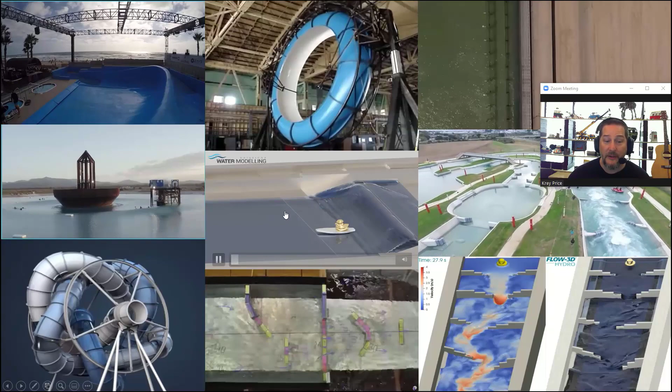As you can see in the background here, we're going to be looking at some fun applications of hydraulic modeling and design. We've chosen 3 activities to focus on today: rafting, surfing, and water slides, with presenters who have combined those particular personal interests with their professional careers. One of the main questions we want to answer for you today is when we move from 1D to 2D to 3D modeling, and when, despite all of the recent hardware and software advances, a physical scale model or a full-size model is still needed.

Along the way, we want everyone to get a feel for the underlying hydraulic principles involved and to see how designers use those principles. So if I'm going to take a ride on this water slide, for instance, and end up at the bottom while water is pouring in from the middle here, I really want to know that the designer understands Archimedes and other background essentials to keep me safe.

We'll also see some amazing new technology for modeling. At the end of today's presentation, we're actually going to get a special guest to come on who helped develop this movable endless water slide for the Discovery Channel, and we'll get to hear some of his experiences.

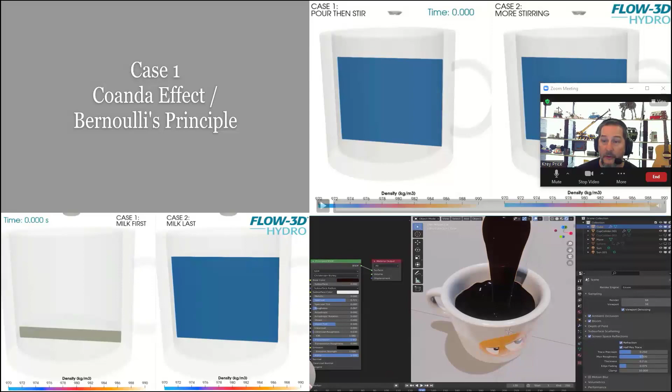Now, there were lots and lots of other random topics we could have chosen to present today. I put out a call a few weeks ago for people to submit some fun modeling applications. So as we kick off, since I see from the map that we've got people joining us from all around the world, all time zones, including ones that are in the wee hours of the morning, I thought I'd start with a CFD animation of your coffee cup.

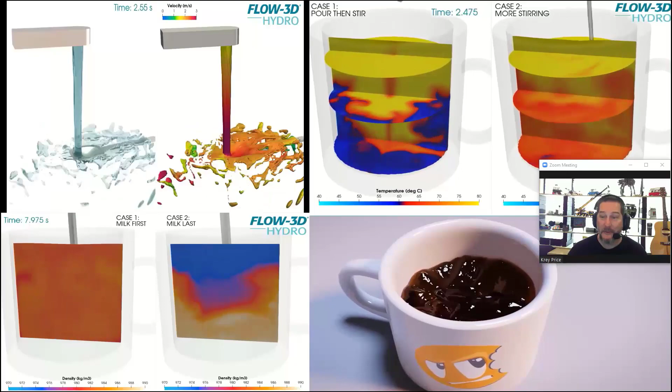This is courtesy of our friends at FLOW-3D. They'll show you here the differences between adding milk first or last and how you decide to stir it. So however you take your coffee, thanks for being with us today. Now, usually I've got a boring logo as my Zoom background. Since this is just for fun though today, I thought I'd turn off the filter and you can see what's actually behind my logo.

Yes, I'm a grown man with a Lego collection, and you can also see my guitar. My interest in Legos and music might not combine as readily with hydraulic modeling as some of the other hobbies we'll see here today, but I'll show how I try sometimes anyway to combine that.

We're going to hear a lot about waves today, and music is really just waves too. In next month's webinar on the Froude number, we're going to hear about how the transition between subcritical and supercritical flow in water is actually analogous to sonic booms in the air.

Since it's casual day today, I am wearing a t-shirt with an album cover that has waves, pulsar waves in this case. These ones are sometimes mistaken for sound waves or terrain.

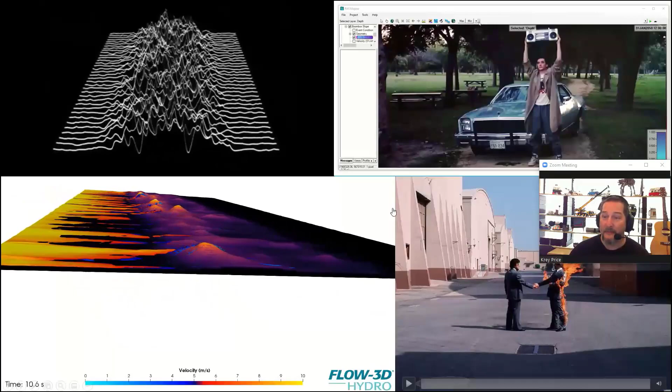Since this webinar is just for fun, I've included the winning entry here with some fluid dynamics right over the top. When I do courses, I'll grab some free terrain data for our tutorial models from random places that align with my interests, including this album cover, where I heard that this guy burned his mustache off in the photo shoot for the album cover, and we try to put out the fire in our tutorial model.

Also, if you've ever wondered why Lloyd had to hold his boombox up so high in the air, this park is actually in a floodplain with a drainage channel, and we've taken out his Malibu with the flood wave here in this tutorial model.

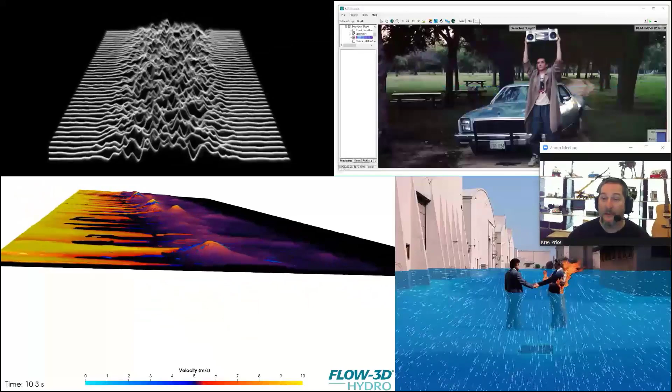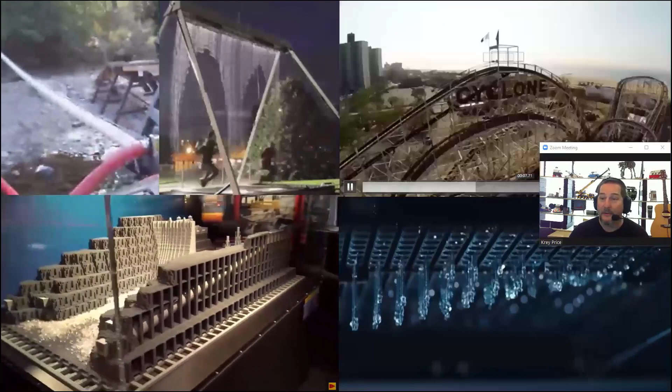So there are lots of ways to have fun with water modeling and design. I can't say I've used my Lego building skills in my professional career, but here's someone who did with this model of the Hoover Dam.

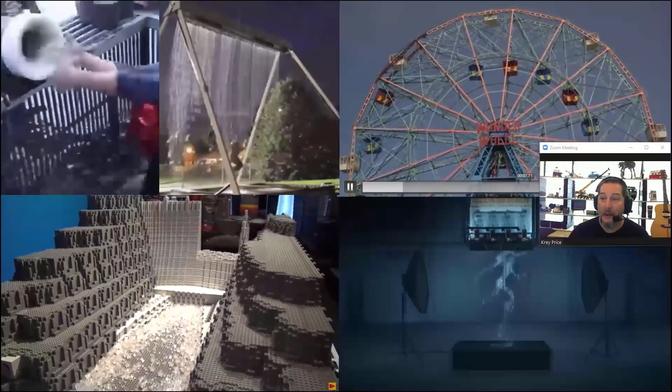I also wanted to highlight a few other random runner-ups that we considered as we narrowed down our presenters for today. Some of you have listed fishing as an interest in the comments, and so the salmon cannon that we featured in last month's webinar might help you shoot some fish into your favorite recreational fishing spot.

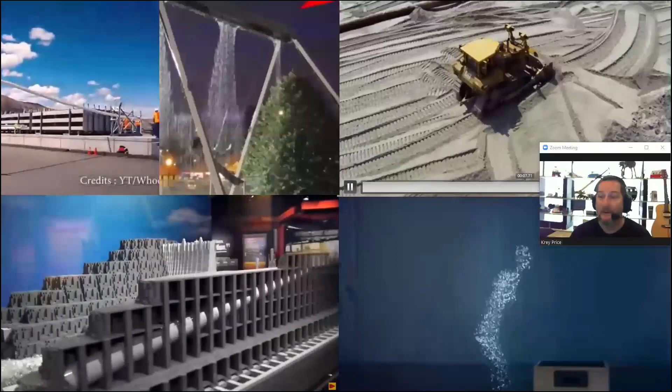Or if you're into amusement parks, Coney Island here is definitely a recreational area, and just like many resorts these days, there are engineers using hydraulic principles to rebuild or nourish those beaches.

If you like playgrounds or sports, just think of some of the hydraulic principles that designers had to use to make these fountains and animations. Likewise, swimming pool designers have to use some of their skills, and they better know their stuff too.

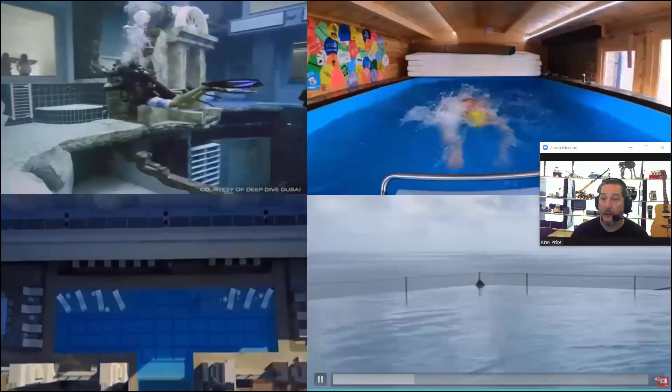If scuba diving is one of your interests, just think of the phenomenal hydrostatic pressures that you'd have to design for to be able to wave at someone through that window if you're 50 meters down in this deep dive pool.

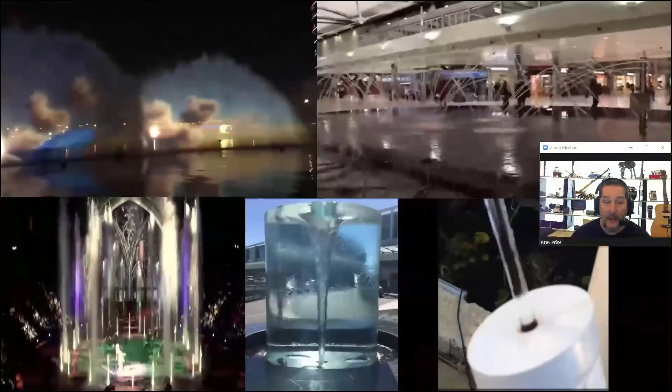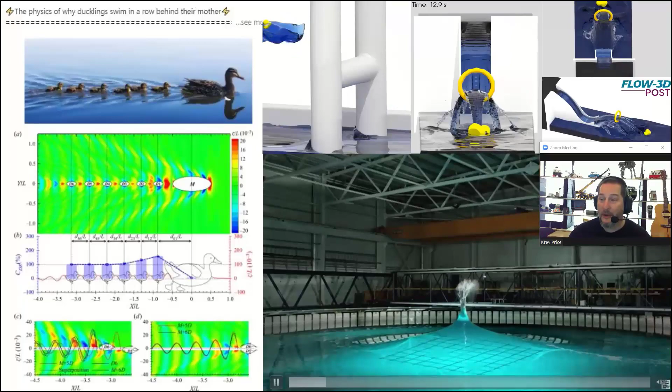There are some modelers who just put things together, well, just for fun. Here are a few examples in anticipation of the upcoming Brisbane Olympics from Water Modeling Solutions. They always seem to like to put ducks in their models that they feature on their LinkedIn posts.

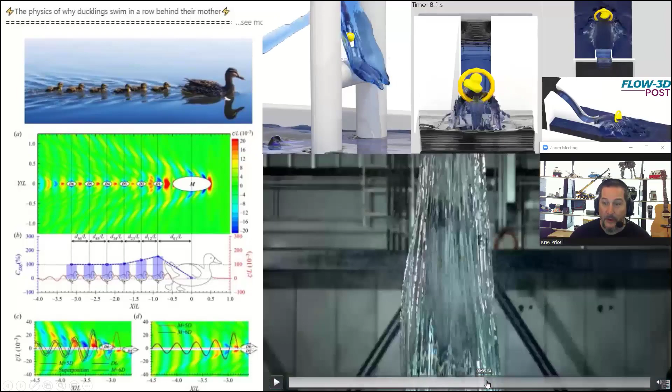And speaking of ducks, you can see here the slow-mo guys. I'll speed this up—they're slow-mo, and you can see here that they put some ducks in a pool, and this is where the waves in a circle start out in a circle and then concentrate into a single point, and then you get some crazy results here.

I don't know if you've ever seen a vertical hydraulic jump. Laminar flow is going turbulent where it hits this obstruction. The same thing happens in your sink in reverse.

I'll get myself out of the way there so you can see laminar flow hitting an obstruction and going into a wave form. Now, there are lots of our attendees with a flood control background.

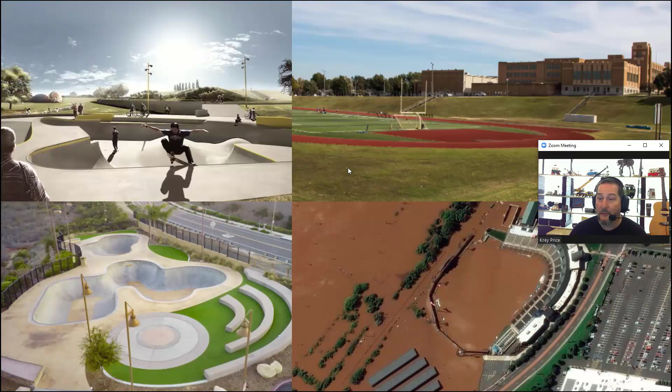Here is recreational overlap. The architect of the skate park is actually a skater himself, and now a hydraulic designer too, because these actually double as detention basins for flood control projects.

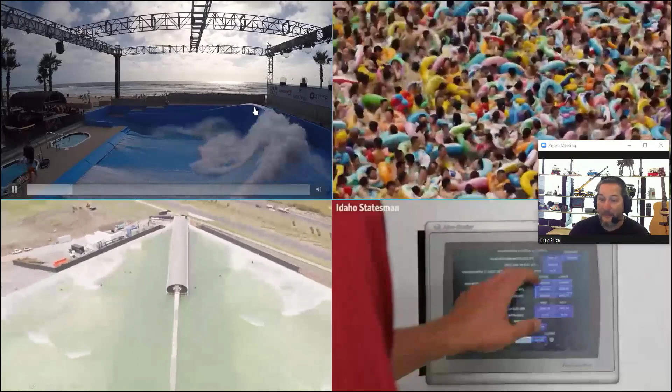So back to the three interests that our presenters will cover. Here, we're going to talk about hydraulic jumps and Froude numbers. You can see the transition for flow here, and we'll also address other relevant aspects of the design process, like public safety and how design principles are applied to make recreational features both fun and safe.

Now, things that are fun can very quickly turn into a hospital visit, or worse, if the designers aren't on top of their game, as you can see here.

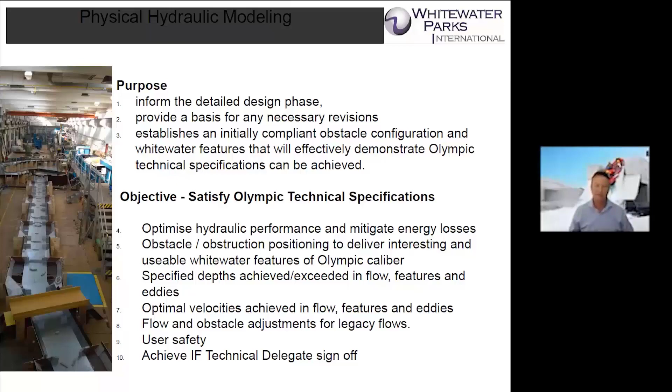So it's really important that we do the modelling right, otherwise the detailed design doesn't deliver on what we're expecting. So we look at things like specified depths and flows, in the eddies and also in the middle of the flow, and then we optimise those velocities around that.

I think Orly and Kurt are going to cover this a little bit better, but really we have to create our modelling parameters from the Froude similitude scaling. The model itself we've done at a 1 to 13 scale, and there's other scaling we need to do to make sure we've got the model at the right scale from an area, velocity and discharge perspective. Looking at the full course, it's 250 meters, so our model was just under 20 meters long.

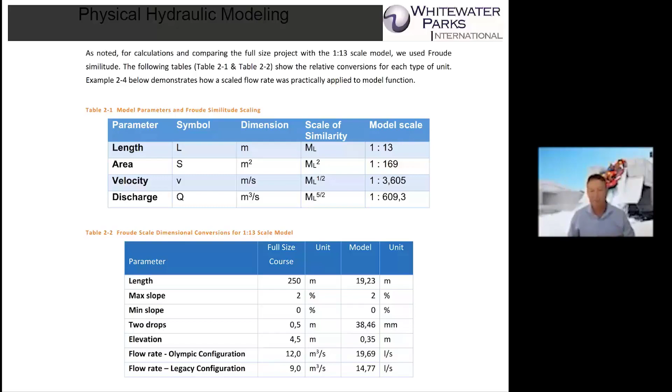Our flow rate at 12 cubic metres is just over 19 litres per second. So we have to move our course design from the left into the physical scale model. Those scaling parameters are incredibly important.

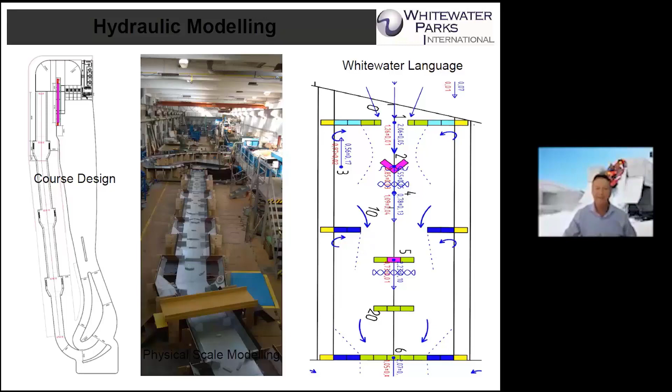Once we've got the physical scale right, we have to create a whitewater language, if you like, to describe what's actually happening in that channel. Everything in the channel where we describe the whitewater, you see the blocks here, and the different colours show the different heights of those blocks. The ones around the 26 metre mark, the green ones, are 1.5 metres high, and the light aqua ones are 0.5 metre high.

It tells us exactly when we go to put these blocks in, and they all come in 25 or 250 millimetre increments. We know exactly the height to build there.

The other side of it is you'll see these numbers here. The arrows give the direction of the flow, so the flow is downstream, from the top to the bottom on your screen. Upstream in the eddies, these blue arrows, the blue numbers give us a velocity number, plus or minus some variation. The red numbers give us a depth, plus or minus variation, and the dot is the point where it's measured. We have over 70 points of measurement within the channel.

This is really important for us because we measure this also in the constructed channel, and then we compare that with the model. Those inputs allow us to make improvements in the way that we do our modelling.

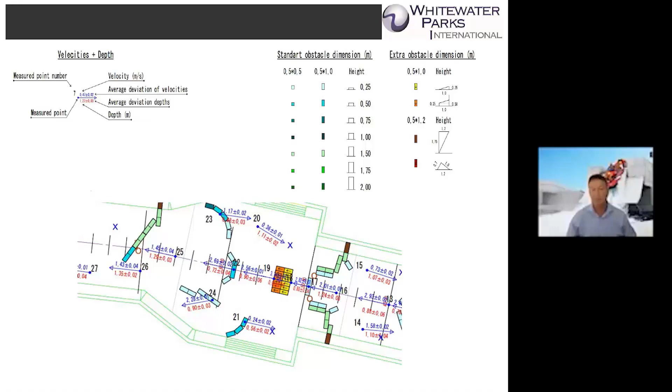So when we're looking at this, the parameters we have to look at are: minimum depth is 600 millimetres at any space throughout the channel, the minimum depth in the eddies is 1 metre, and the maximum velocity upstream in those channels is 1.5 metres per second. We really have to make sure that we don't have any overtopping of the channel, that the surging is minimal, and that the whitewater is suitable from an Olympic perspective.

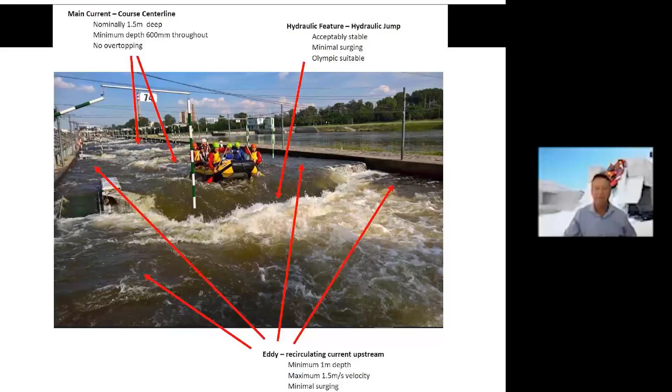One of the real limitations of the physical modelling is we can't get the air entrainment. So there's a bit of experience needed for that, because that will create a slightly higher hydraulic jump, be a bit more retentive, and also slow the water in different parts.

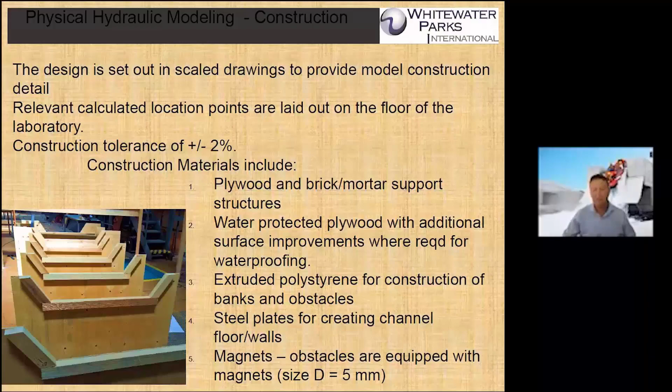We then go on to the design from the scale drawings, with a construction tolerance on the laboratory floor of plus or minus 2%. We build it out of plywood, using brick supports where we can, and spend a lot of time making sure we don't have any leaks and waterproofing it. As we build into the channel itself, we use extruded polystyrene, then cover that with steel plates so we can move the obstacles around, which have magnets in them.

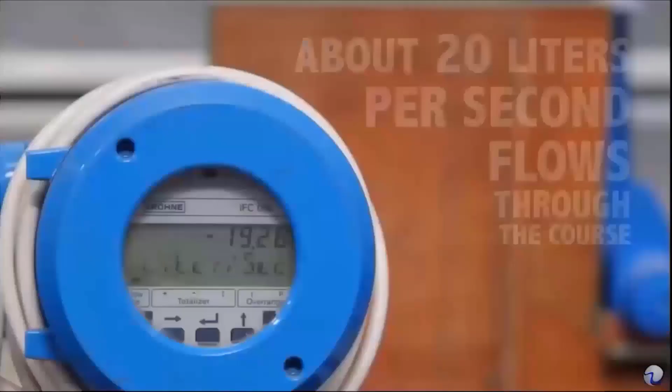So if I start the video here, we've got this in partnership with the Czech Technical University, and basically it's just a little video on how we actually put that together. The main thing is to see if we can make sure this scale model conforms to what we need in reality.

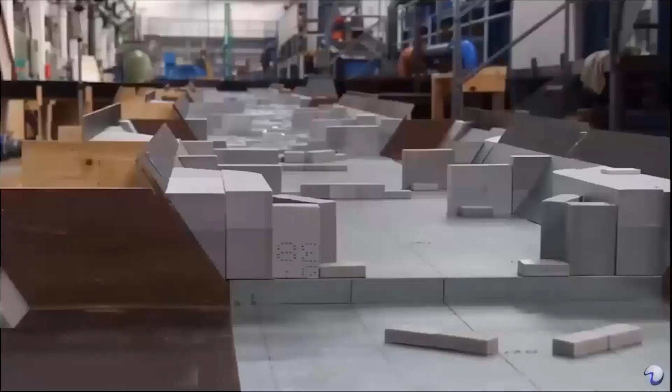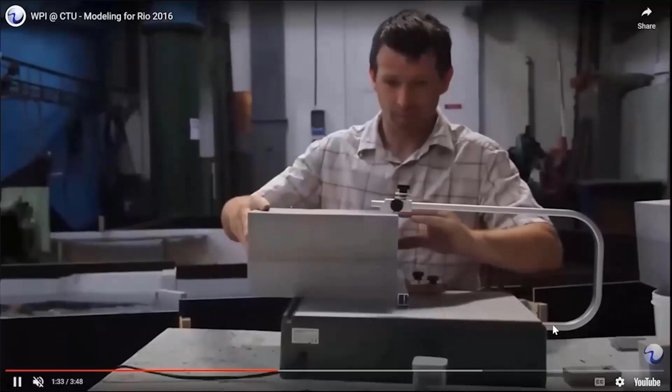As we said, it's just over 19 litres per second, which is going to give us the 12 cubic metres. That then allows us to actually use the adjustable components of the obstacles. This was one of the things we had to come up with: how do we quickly move things so that we can change things in real time?

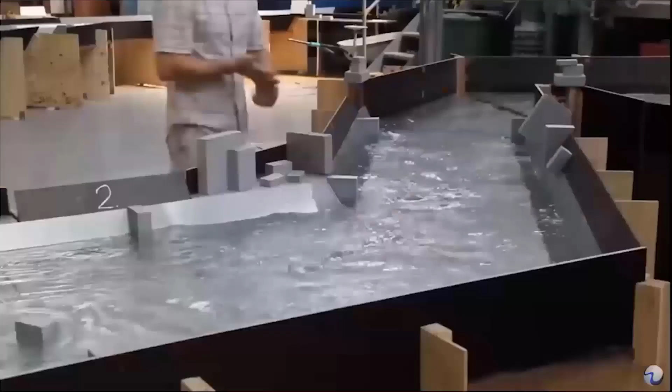So we've created these real scale models of obstacles, and we've put magnets in them. We're able to then place them in the water on the sheet metal, and in real time, we can pick them up and move them around so that we can create the hydraulic conditions we need. If we find we don't have the optimal hydraulic conditions, it's very easy to just move those obstacles around and create something different. This has sped up the hydraulic modelling quite significantly.

Then, what was important when we did the measurements is that we come back and integrate that into our future modelling. This allows us to go from a model into reality as closely as possible.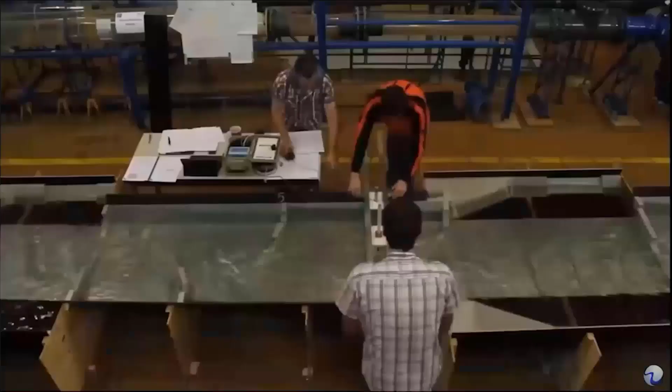And I think we're pretty good because we control everything in these models up to around 90% of where we should be. The last sort of 10%, we need to get in and move it because we can't control that entrained air.

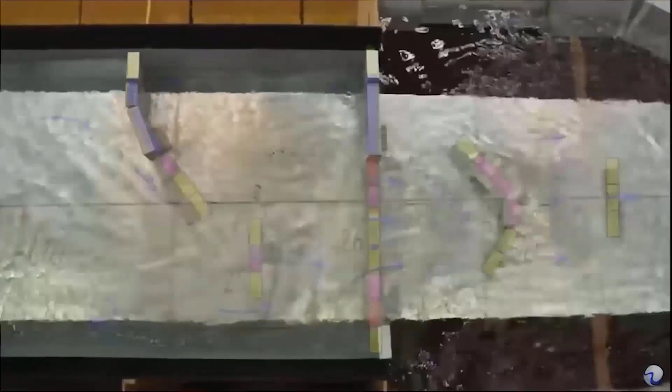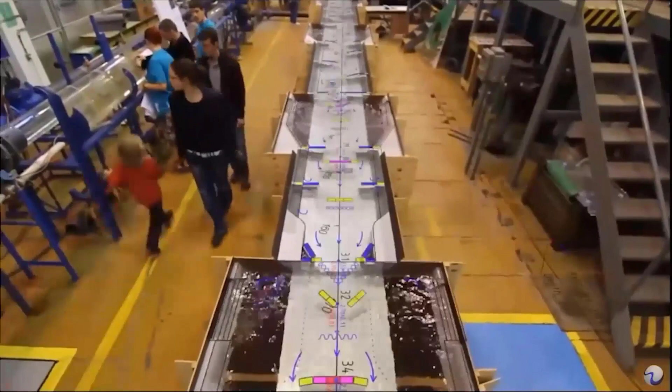We've got a little bit of different friction coefficient. So we're looking at the variables here, and these impeller flow measurements equate really very well with what we do in live situations. This is an idea of that computer language overlaid on top of the model itself, which we're then overlaying back onto the real whitewater we've created.

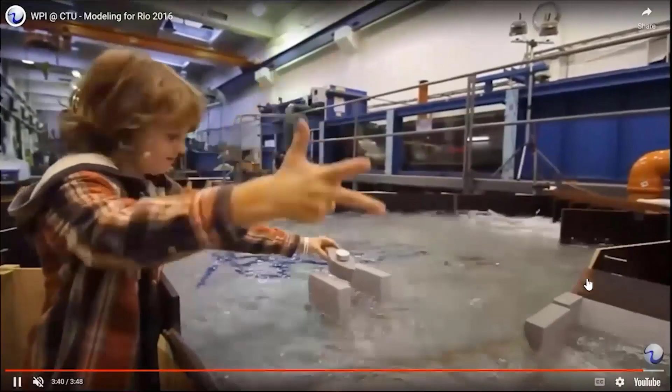It's always good to have kids involved, and they always like to play in the water and take their little boats in, but that's a nice thing that the university has been able to do.

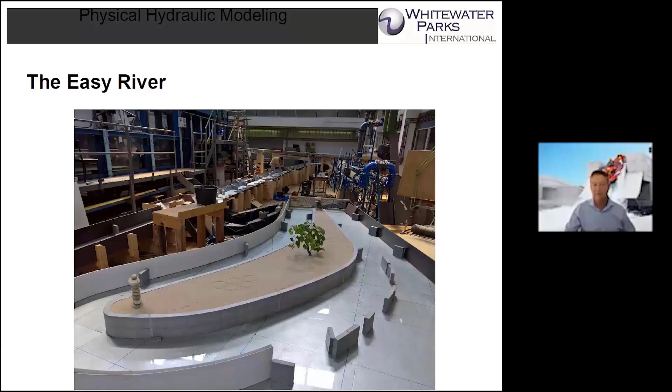The next part of this is at the bottom of the Tokyo course, we have an easy river, and I think you've probably seen a number of these as lazy rivers in different situations. We've had to take that and really change the concept. We've added within that 15 different pumps. Each one is about 0.2 of a cubic metre per second. So it's big, and we get flows between 1 metre per second and 2 metres per second in different things.

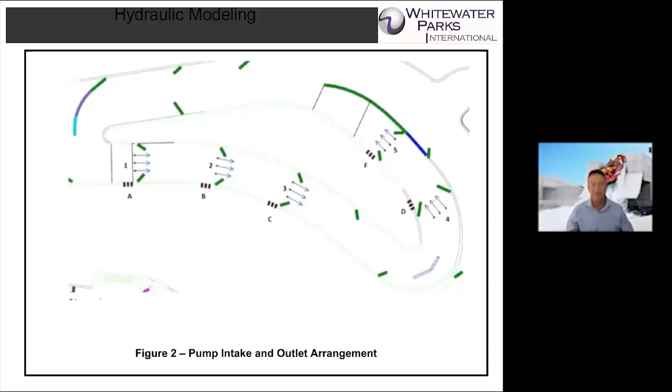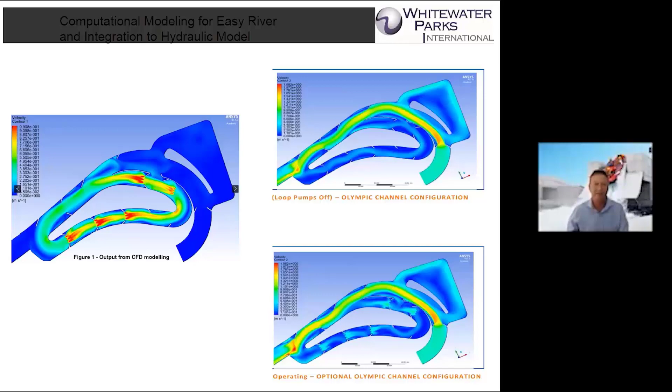But the issue is this outside lane is the lane of the whitewater course, and its integration into that easy river is where we use the fluent model to do that. We can't really do that in the physical model. With CFD modelling, that allows us to do that. And this is the main thing. The other place we use it is down into the pumps, but I think Orly and Kurt are going to go through that in a lot more detail. That gives you an example of using hydraulic modelling on the ground and in real situation.

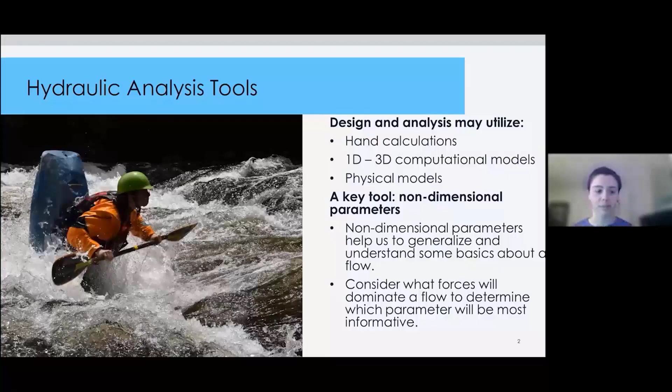So a CFD model like this, you can grab data from any slice, vertical, horizontal, and get a pretty good idea of what flows you might expect. It's a really good tool for doing some rapid prototyping to see what might change under various flow conditions or if you change the geometry. But there's going to be uncertainty related to the model. The computer models don't do a great job accurately representing aeration.

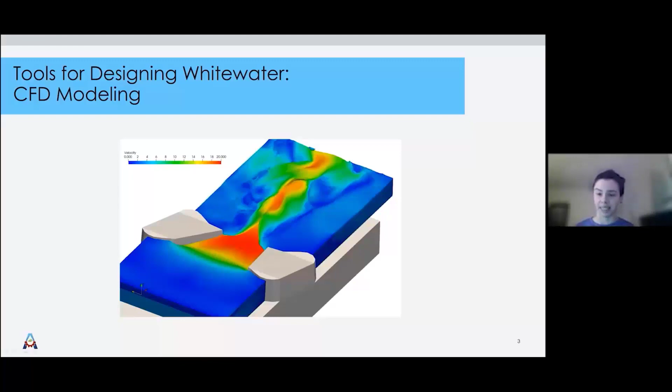We'll show some photos of a wave in a minute, and you'll see the white part of the white water is actually air mixed in with the water. That doesn't come through really well in the computational models. There's also scale dependence within the model grid that you set up, so you have to think carefully about how you're setting this up to make sure it accurately presents what you might expect to see in the field.

The next step up, if you have the budget for it, is to do a physical model. These are really fun projects to work on, and it gives you a more accurate idea of what things will look like in the field when you go to construct. John mentioned that they do a lot of work and feedback from seeing what it looked like in the field, and you can go back and fine tune your physical model. It's really nice to have all that information so you can design better as you move forward.

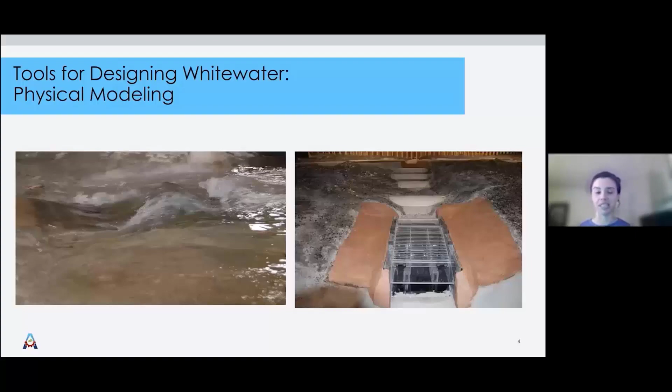The air bubbles are still going to be tricky to scale in the physical model, so it's not going to be exactly perfect, but it's a really good tool to give you more confidence in your design before you go to build.

John mentioned when you're setting up your physical model, it's really important that you think carefully about the physics and that you're accurately representing them at a smaller scale so your model will be as realistic as possible. For a free surface model, meaning the top of the water is open to the air, the most important thing to consider is matching the Froude number.

The Froude number is a dimensionless parameter, defined here for shallow water waves, like in a river, as John showed in his previous video. The Froude number is the ratio of the velocity divided by the wave celerity. The wave celerity means how fast a water wave travels across the surface of the water.

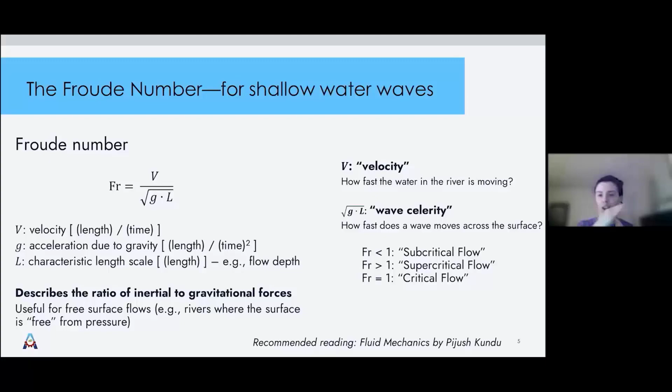Not all hydraulic jumps are going to be fun. John mentioned that they designed this really cool plunging waterfall you can go over in a raft, and they had to be really careful modeling it to make sure they didn't get a dangerous hydraulic at the bottom.

Big picture, what the difference might be is that in one spot, or with a similar geometry, you could wind up with a nice fluffy wave that sits right at the top of the water column, with mostly the water shooting across underneath. So if you flip over or get out of control, the river right underneath will help carry you downstream and you won't get stuck there.

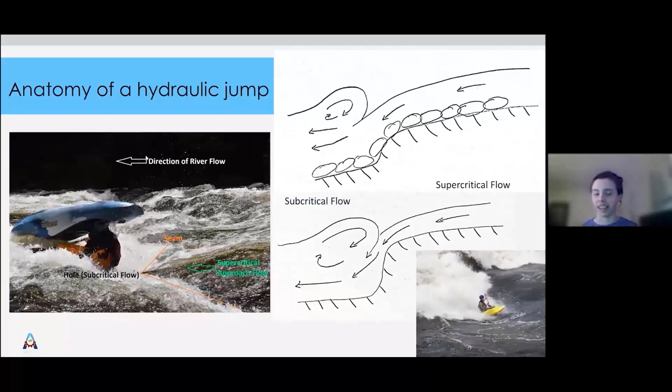So let's look at what this looks like in the real world. You can see up on the right side of my screen there's slower water moving across. The speed picks up a little bit going over a rock underneath. It goes over the rock, plunges down into this pool, and then we get this recirculating region where the water right at the top of the wave is actually moving upstream, forming this standing wave right here. That's really fun.

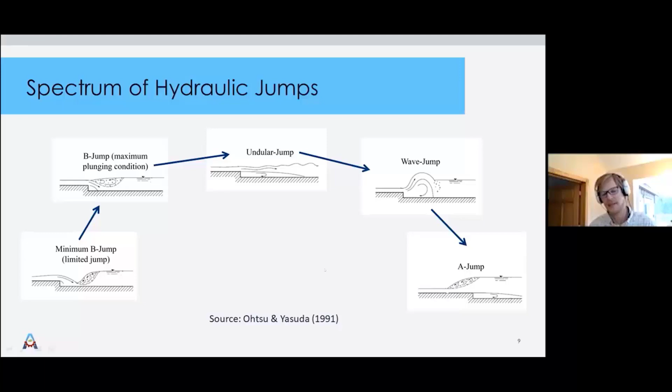I think it's useful to look through each one because they each have different safety and recreational impacts. Starting off with what's called the minimum B jump, this is where you have a supercritical jet that comes in from the left, and that plunges all the way to the bed and creates this big aerated recirculation region. From a safety concern, this is what you would see at a low head dam, where you have this roller that can then entrap people because you just get stuck in that recirculation region. This is generally a function of a lower tailwater height, because that supercritical jet just plunges in and goes all the way to the bed.

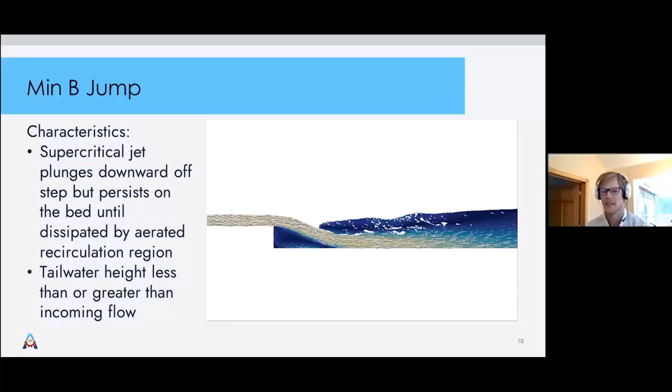As you start to increase the tailwater height for a given Froude number, the structure of this jump will change, and you'll see the supercritical jet now starts deflecting upward a little bit. You still have this aerated recirculation region that's very chaotic, but in some cases for kayaking, you do play in these recirculation regions. So it's quite hard to determine what's safe or what's not, because these flow structures are scale independent. But from a retentiveness and safety standpoint, that is dependent on scale of that recirculation region.

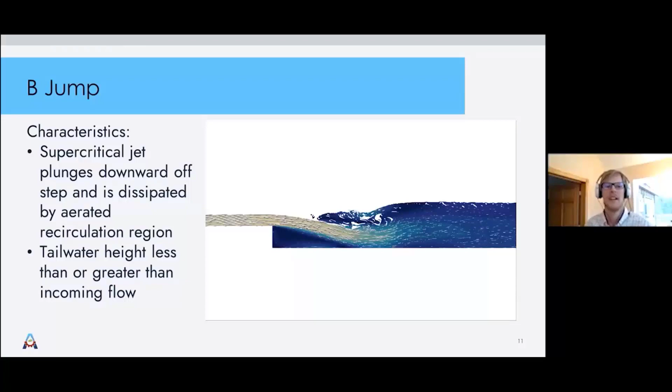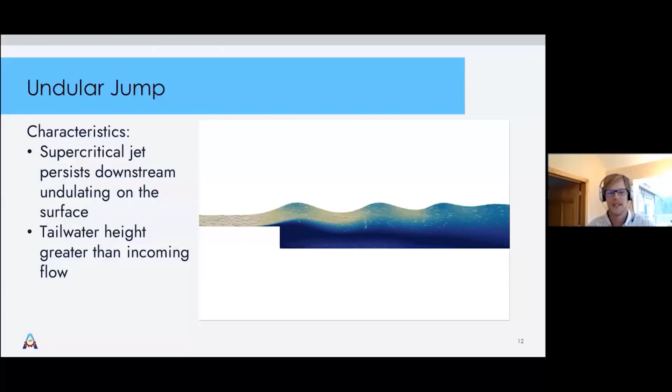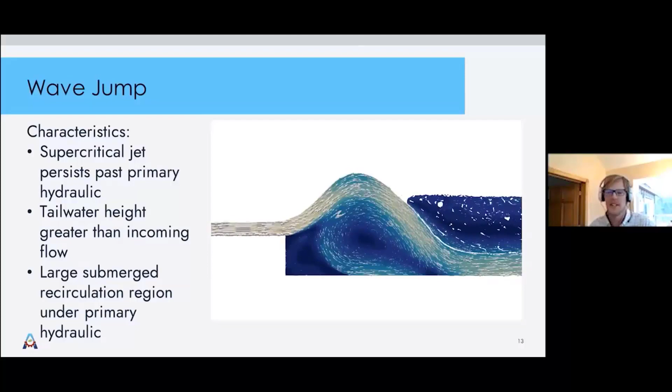So if you continue to increase the tailwater, you'll end up with what's called a wave jump. This is a pretty extreme example because the wave height is several multiples of the flow depth, so it's pretty impressive to be able to get it to stand up that high. You can see through the animation, you end up getting a submerged recirculation region directly under the wave, and this is what stabilizes the wave and props it up. Now, there is also a safety concern with something like this because you now have this secondary hydraulic with a large aerated recirculation region behind it.

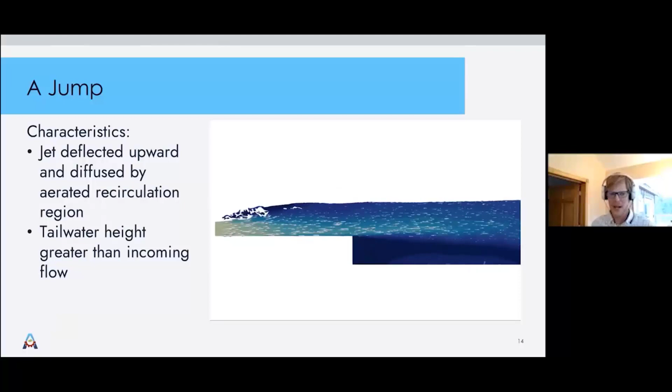And as you increase the tailwater height even further, you'll end up with this A jump. In this case, the supercritical jet comes in, but it gets deflected upward to create this smaller recirculation region. Now, in a whitewater sense, you would call this like a wave hole. So these are commonly played in, but there can be a point where there may be a safety concern.

So when you look at these as the full spectrum, you start out with a minimum B jump, and then as you continue to increase the tailwater height, it transitions into a B jump. When the recirculation region washes out, you end up with an undulating jump. And then when you increase it further, you end up with a wave jump, and then even higher is the A jump. And past that, it just becomes a submerged hydraulic jump. So this is for a given Froude number.

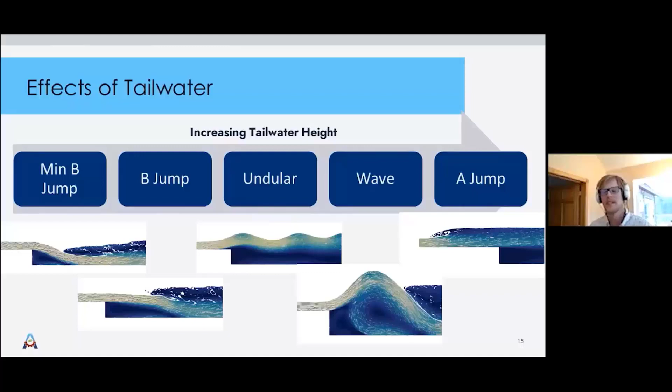And same thing for safety concerns - if you know what your Froude number's at and what your tailwater's at, if it becomes like a B jump or something, you can increase that tailwater height to try and get it to wash out a little more.

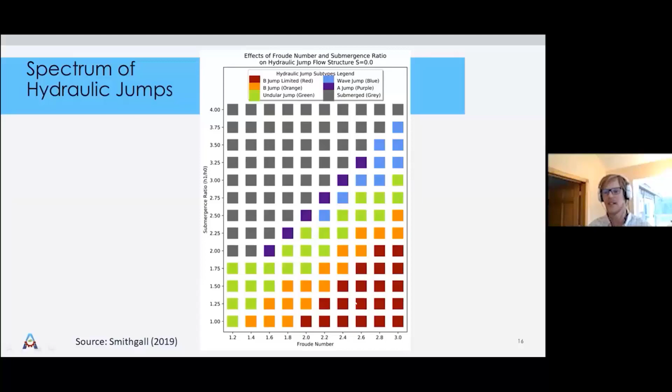So then when thinking about specific projects, whitewater is pretty tricky. For a dam, you'll have a rating curve as your design criteria, but with whitewater it's quite subjective. Like in John's case, a lot of the successful whitewater designers are also whitewater paddlers or surfers.

You have that real world experience with the whitewater itself, not just studying it from an engineering standpoint. These projects are also difficult because you need to balance recreational value along with safety. When working on natural rivers, you also have ecological function, and fish passage often becomes a concern when designing parks like these.

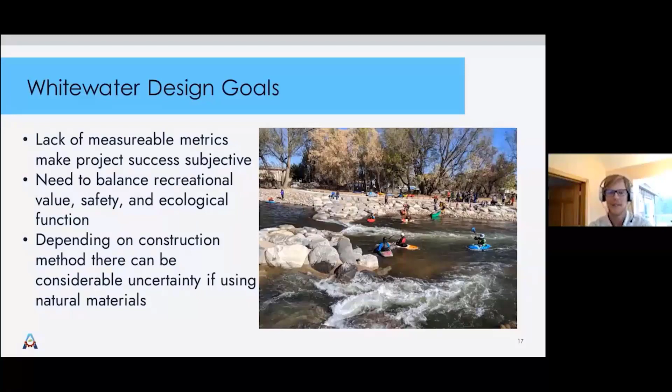Similar to this photo, there can be considerable construction uncertainty when designing these grouted boulder structures. The pump parks like the Olympic ones, luckily those are smooth concrete and your tolerances are a lot smaller, so the uncertainty is a lot more manageable compared to when you're working with large boulders where there's a lot more variability in material.

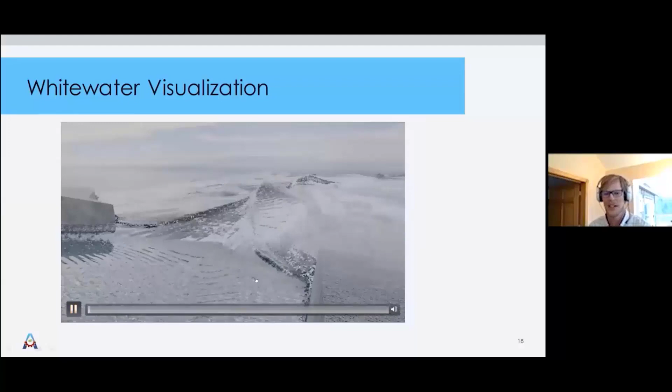One last plug that's kind of neat: you can also use CFD to visualize like you would with a physical model. This is just a little extra step where you take the model outputs and render them. This was done in Blender, but it gives you a nice tool to show what a given feature would look like without having to go so far as, say, building a physical model. So you can prototype more realistically, as well as get some marketing aspects.

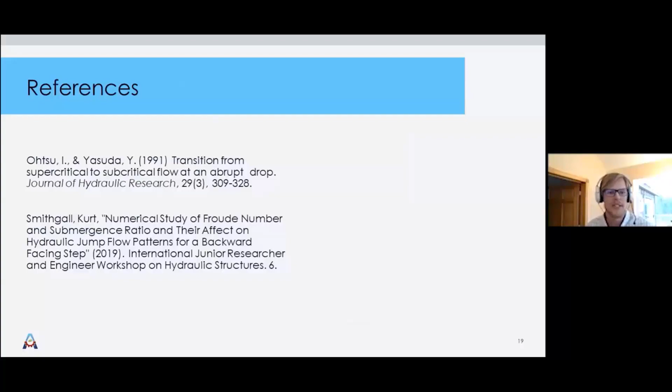My PhD was in surf science, and it's really been about applying the surf science through numerical models, used through design and through the management of artificial surf breaks and pools, both in the sea and on land, but also in the management of surfing breaks and their protection, so used through a variety of things.

One of the things, as I said, I'll jump through these. We've been doing a lot since 1999 so far, and so my images and some of the videos are pretty grainy. Some of them are old, some of them are new, some are the latest stuff we're working on.

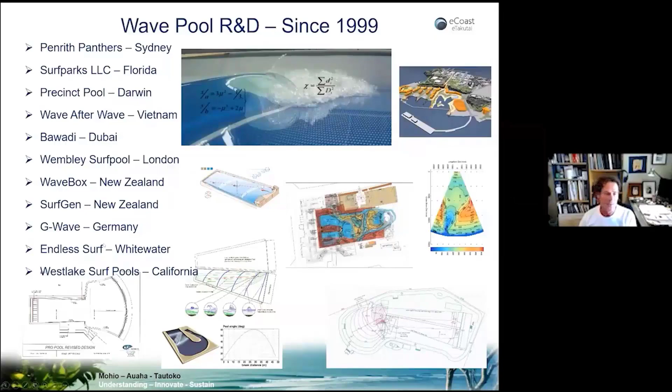So we're looking at everything from plow designs, very like a Kelly Slater type of pool or surf ranch, then a caisson design using air to push up the water, and a flat type design.

So we've been involved in designing the wave generators, so these kinds of things. And then we use the numerical modeling for the design, and physical modeling is the end product.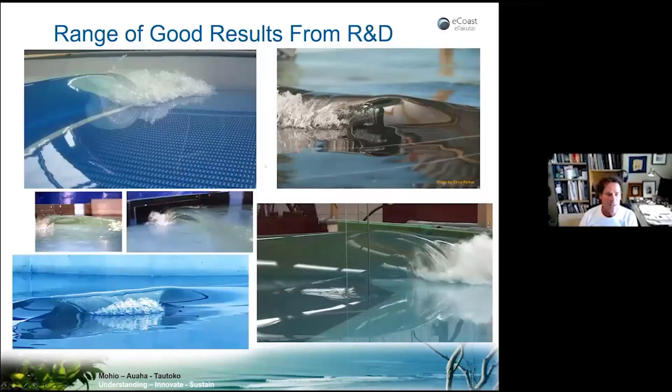One of the things Craig was talking about is when are you using your 1D, your 2D, and your 3D models, and when is it time to jump to a physical model. There's been some good results over the years, and that is the normal process for us.

We will start in, I'm calling these one-dimensional, but they're slices through the model, or in one dimension. In this one here we're looking at generator design. The critical issue really was turbulence around through here. This is a plunger type design, same as a caisson, where you're lifting air up and down and pushing out. So these dimensions and the morphology of the generator to fire that wave up against the pool are really important, minimizing turbulence and getting that right aspect of surfability.

I probably should have put a slide in on surf science, but really what we're trying to understand and bring together are the three parameters of wave height, the wave peel angle - how fast the wave peels - and the breaking intensity, which is how hollow those waves are. Then next, in 2D, we'll often use a Boussinesq type model.

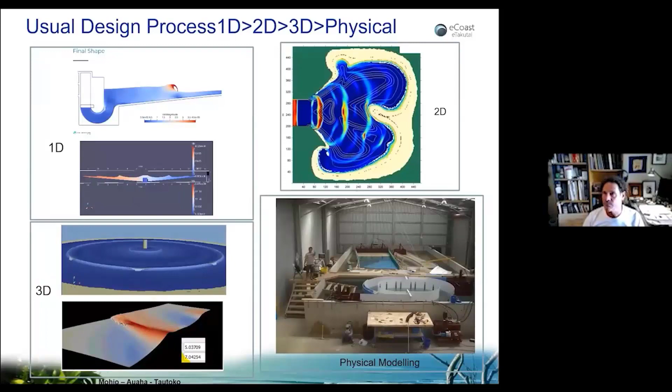This is going really fast - it's actually a 500-meter pool. Using that kind of thing, we can stop, investigate at any time, take transits through, look at wave heights, put an overlay on the breaking patterns to look at peel angles, and also through taking slices, we can look at what the orthogonal gradient is.

That's the gradient the waves are traveling up, so we can work out how intensely they're breaking. Our next stage, we go into the 3D, and I'll loop back to that at the end - a lot of it is mostly for visualization.

We've been looking in the last few years at wave-driven currents, aspects like that, and there are some problems we hit. Finally we get to the physical modeling, and there's a lot we have to look at. As we heard before, it's very hard scaling things like air bubbles, and also actually getting a real handle on what the wave-driven currents are.

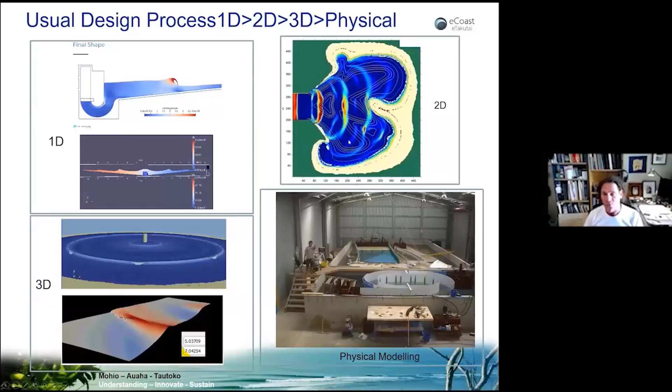That's one of the biggest issues for us. When you're driving all that energy into a small area, you start to really set up currents. And while you want them in, say, your kayaking, you don't want them in your surf pool.

If we look at a project from back in the early 2000s, this was where we designed our own generators for it. We were originally looking at caissons, and I'll show you why we went away from them - but first in 1D, then jumping into 3D. Auckland University bought these actual generators off us about 12 years ago, and I understand they're still working.

Then we're using the Boussinesq type models. Boussinesq models are actually very good for looking at your reflections and your wave-driven currents. We often use them - a lot of my work is in hydrodynamic modeling and sediment transport modeling. So you use your Boussinesq model for looking at wave agitation, say within a port structure.

And then things like looking at the elements that we're constructing them out of - this was to do with a moving floor. We actually, this was a third party that did that, it's not my own modeling, but it was very useful to get us to understand how they all work together.

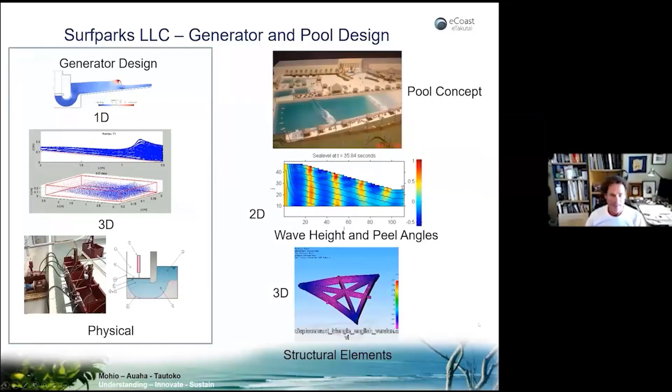So from those models, we then get into the physical modeling and really want to validate those surfing aspects - how hollow the wave is, how fast it's peeling, and how that fits into skill levels for surfers. One of the big problems, like I said, is the wave-driven currents.

It was much easier back then, before we really had the CFD models working very well - we didn't have the computer capacity to get them going - using the physical modeling to look at these flow return systems to take those currents out of a pool.

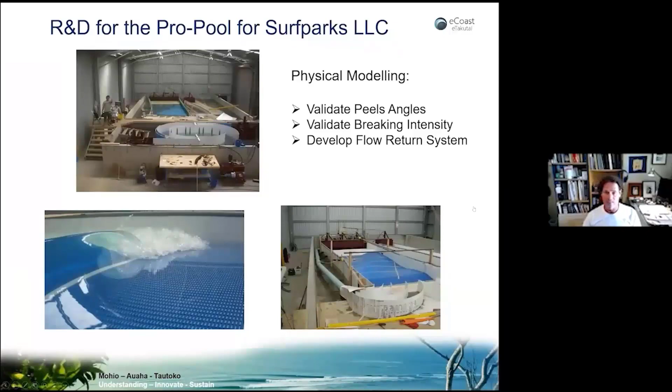In this particular project, we actually went - that one there, we're looking at a 1 in 10 scale model in a warehouse - and we went all the way to a 1 in 1 scale model, and this was in Florida.

And these are the big caissons, the air-driven ones, and I'll show you why we went away from this type of thing and why they weren't actually used way back. This was 2006 - you can see a guy on the side of the pool. You can see the height, the wave comes up probably about 8 foot, but unfortunately there's no back to the wave, so by the time it propagates away, we lose half the wave height. But very useful getting a full scale model and learning that kind of thing.

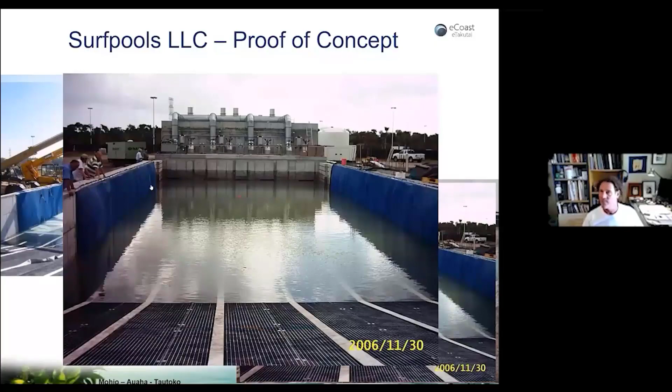Another one we looked at - this is just a continuous wave, a New Zealand project that never got off the ground. This generator moves from side to side and generates a wave in both directions. We had to modify that generation, looking at what our issues would be when we're trying to do that and spin it up.

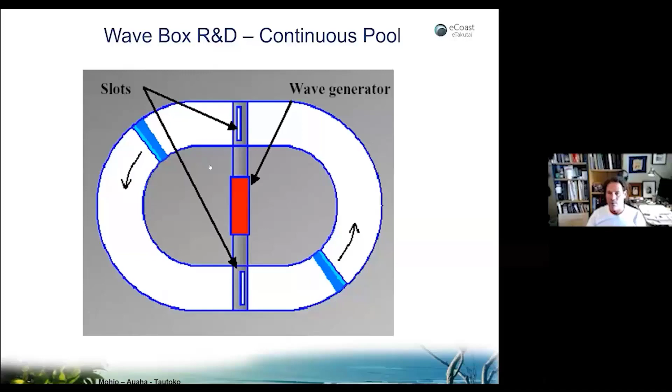So getting our initial work from the numerical models and then going into the physical modeling.

A thing about physical modeling, and it's similar with numerical modeling, is you end up with screeds and screeds of data which you have to analyze.

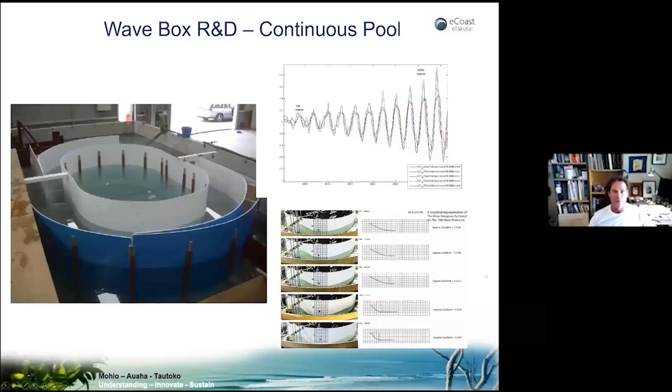What we're looking at here, this whole continuous pool, is because you're reinforcing the wave, by about the 10th or 11th wave you can reduce your energy input and have a wave that goes round and round the pool. It's more of a fun wave rather than surfing. You see here how we're getting it up steeper and steeper. If we break the pool, the waves, then we're moving water particles and we make a whirlpool that won't work. So we're looking for that critical point where it's standing up but not breaking.

There's some really exciting stuff actually coming out of the Webber design work we're working on, but we're under a non-disclosure agreement with that one. Here, just looking at the endless surf.

We're mostly using SPH, DualSPHysics, using top of the range graphic cards to drive the modeling. Due to COVID and travel restrictions and lockdown, we've been working and collaborating with Endless Surf, or Whitewater, in Canada and France. Doing all our work just in 3D modeling, we haven't had a chance to do a physical model, but we've been able to look at each of the aspects.

So what's the breaking intensity, the peel angles - by plotting you can see the wave coming in and the broken areas. You can measure the peel angle, which is the angle between the crest and the broken whitewater.

Looking at overtopping, we're trying to get the currents out of the pool. But what kind of turbulence is that creating in our flow return system? Things like reflections, how we're getting rid of them - they're a combination of bouncing off the wall and this overtopping we see here. And even looking then at getting into wave-driven currents and how long they take to dissipate.

So how many waves can we have in a set when we drive them, and what are the best ways to get rid of them? Just my last point is that we're getting into this to try and optimize your computer time.

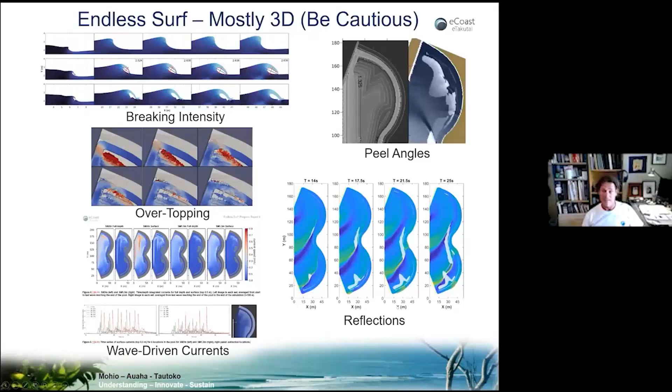So we still don't know what is real when we're using these models without actually having a physical model to validate them. And that's it from me. Thank you.

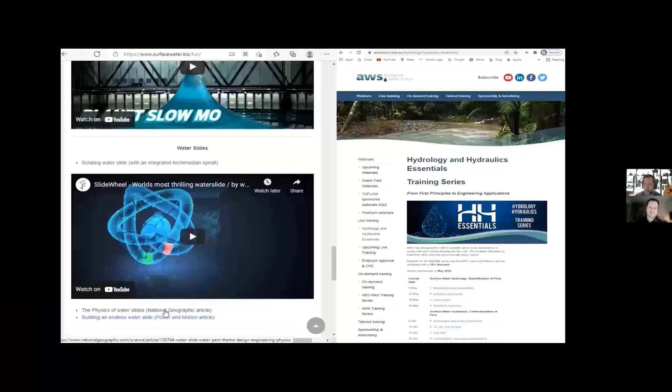I just wanted to share here a couple of things about water slides, and the question that came up that we put onto the webinar registration page was whether you've ever ridden a water slide with an integrated Archimedean spiral. That's what we've got here on this animation.

You can see the equations behind an Archimedean spiral, and this kind of feeds into what we're talking about with some of the courses coming up. We want to take things that are this complex, even for a simple circle, and imagine what this would look like for the actual constructed project here, and really simplify things and explain these terms.

In some of these courses coming up - but what I wanted to show you here as well, this is the one we were just looking at, that's a German design for a rotating water slide from Wiegand. This right here is an American design, as we'll hear now I think from Dennis a little bit. And then I wanted to show you a rotating water slide here in Australia. These Hills Hoists - we've got one of these in our backyard - and when the Australians on Australia Day get together and do a rotating water slide, well, this is what it looks like.

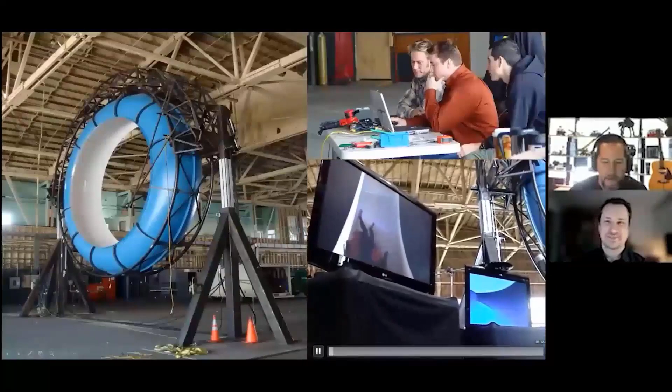In 2008, this is the Backyard Waterslide Simulator episode of the show Prototype This, put on by the Discovery Channel, produced by Beyond Productions out of Sydney, Australia, the same production company that did Mythbusters. I was invited to help out with the hydraulic controls on this particular show.

They were having a little trouble, and this is a very massive build. They have a 6,000-pound wheel that is lifted up and down 1.5 meters, tilted back and forth 1.5 or 15 degrees, and it can spin at up to about 14 to 15 RPM. They have a computer-generated water slide of whatever geometry and length they want, and they project that computer-generated water slide into the tunnel right there.

Andrew Brooks — that's him right there with the white mohawk, he's Australian and also an MIT roboticist — extracted the motion data from the video, and then I took that data and created cubic splines for the 5 axes of control being controlled right there on the water slide. We basically created a ride.